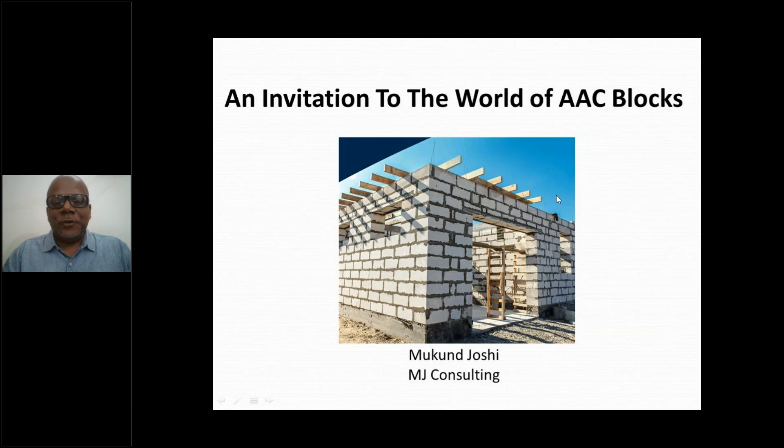Friends, you all were shocked yesterday when we heard about Russia entering Ukraine and the war began. A similar thing happened in Europe at the time of the First World War, and unfortunately there was a lot of destruction. After the war ended, Europe wanted a building material that would help them build houses which would keep the cold outside.

They were looking for a building material, and a Swedish architect cum scientist, Mr. Ericsson, invented aerated concrete in the year 1920. Their purpose was to keep the cold out of the house. Our purpose is to keep the heat away from our home. So the purpose is the same, thermal insulation, and this product was invented to give a very high level of thermal insulation. We will go ahead and see how it happens.

This product gained popularity in Europe because of its lightweight nature and thermal insulating properties, and by 1935 there were already so many plants all over Europe producing AAC blocks, selling them, and people using them. So this is not a new product, although in our country we feel it has come only in the last 10 years, but in the world it has been there for more than 100 years. We are here in 2022, and this product was invented in 1920.

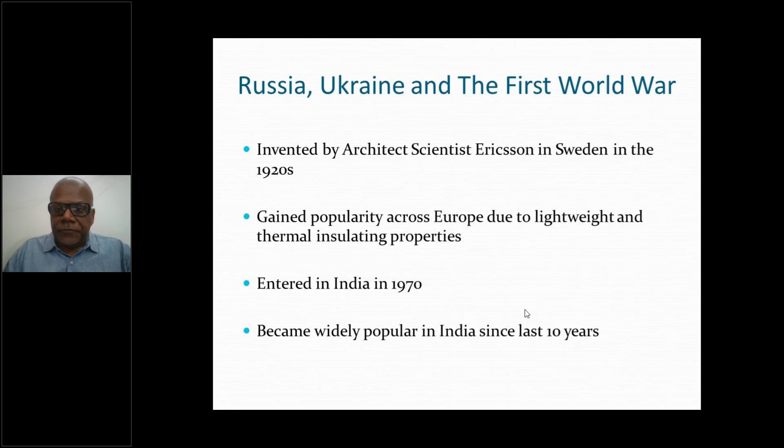We all civil engineers know that the strength of concrete is a function of time and temperature. During winter season like this, we know that de-shuttering gets delayed; we can't do speedy construction as we do in summer. There's a small delay because the temperatures are low and the strength development also becomes slow. So the strength development of cement is a multiplication of temperature and time. If you increase the temperature to 200 degrees like in this autoclave, you can extract the 28-day strength of your cement within a 12-hour period.

Many of my QC fellows know that we do accelerated curing in our batching plant just to predict the strength we are going to get. What is accelerated curing? You give heated water to your concrete cubes and get the strength—that's what we do.

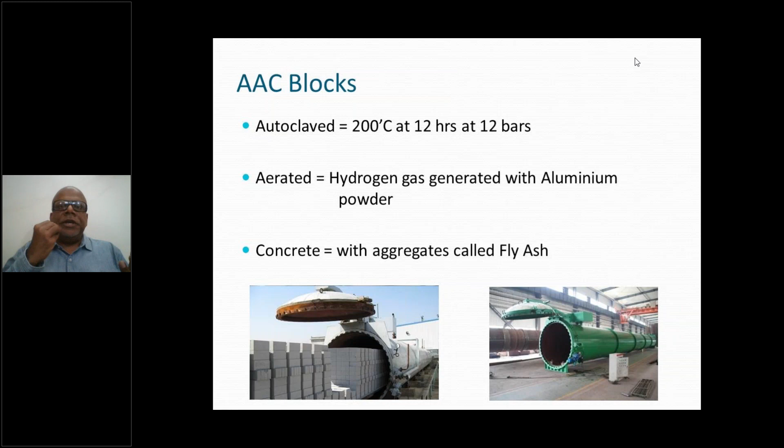So let's go to the next slide and see that mankind has been using red clay brick since 5,000 years now. Mohenjo-daro excavation, if you see, we still get the same brick which is there today, same dimensions, same properties. The whole world changed - we came to using mobiles and internet and everything - but the red clay brick did not change. It remained. Why? Because it was a good product. It had certain properties, you can make it at a very cheap cost without spending much money. The red clay brick can keep the heat away.

So in strength, when you ask for AAC block, you get a very consistent product, which is 4 Newton strength. The second most important reason, coming from our aeration, is density. Density means weight, let's not get confused by big words like density. Just the weight of brick is 2.5 times more than the weight of an AAC block of the same size.

So what happens because of that? Your whole construction becomes lightweight. Lightweight doesn't mean low strength. So it is high strength construction but low in weight.

Now this is a partition wall, right? What is behind me? Why would you want to increase the weight of this partition wall? This is not a load bearing member. We are all staying in RCC homes, right? So they are just for partition purpose.

So when you reduce the dead load of a building by using AAC block instead of brick, the dead load is suddenly reduced. This means you need less reinforcement steel, less concrete section, and the construction becomes cheaper. Also, because of this lightweight construction, the construction becomes earthquake resistant.

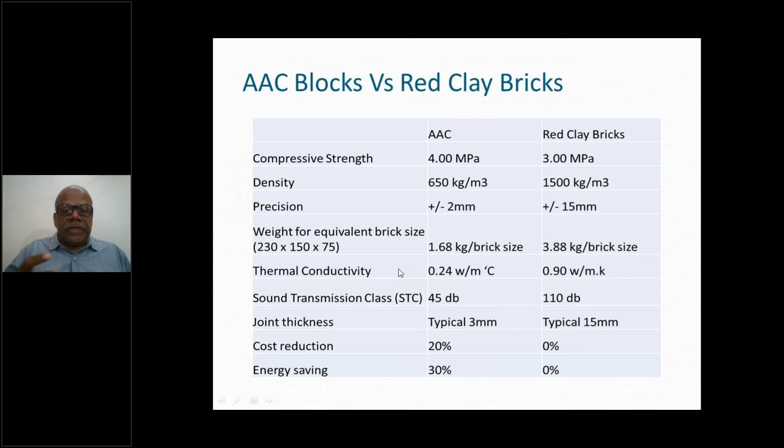Okay, now we will go to the next slide. In the meantime, also we have to look at the joint thickness. Because it is a factory made product, it is perfect in size and shape, so you need a very thin joint, not like our clay bricks where the shape is completely irregular.

You put a plumb bob on the inside of the wall and you get a very nice finish, but if you go outside, the whole wall is out of plumb. So you have to do a very thick plaster, more than 1 inch sometimes. With AAC you can do a very thin joint, very beautiful construction.

So by now we understand that if anything is heavier in weight, more heat will come inside, right? It will become uncomfortable to stay in a house. It will become more earthquake prone, that house. The cost of construction will go up, and that is how the density, the weight of the product, is so important. We'll go to the next slide now.

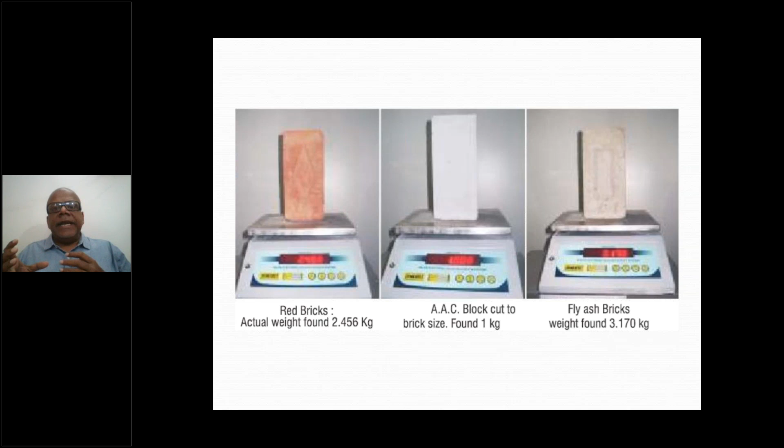And therefore you see that fly ash bricks came to India very strongly around year 2000, but they are not there now, because customers realized that if you stay in a fly ash brick house, it would be very warm compared to a red clay brick house. And even today customers get confused between AAC blocks and fly ash bricks.

Both of them contain fly ash, right? But are AAC blocks fly ash bricks? No, no, no, no, no. The main difference is aeration, the density.

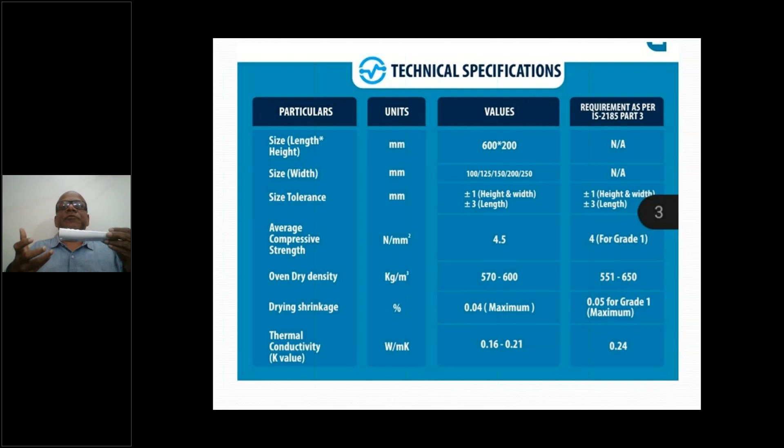So we are talking about aerated blocks density, how much? 650 kg per meter cube, even much lighter than water. If you take an AAC block and put it in water, it will float. So that low density we have got, and that is the magic, that is the secret of success for AAC blocks all over the world.

Here I have, if you look at the last column, it is about the IS code, and a very straightforward IS code we have got. A very nice IS code which tells us 5 properties. If you are going to order AAC blocks, what are the 5 properties you should check? So first is dimensional tolerance.

So lengthwise, maximum 3 mm is allowed, but height and width, which are so critical to us, should not be more than 1 millimeter. Then about the strength, you need to order a grade 1 block which will have a minimum strength of 4 Newton per mm square.

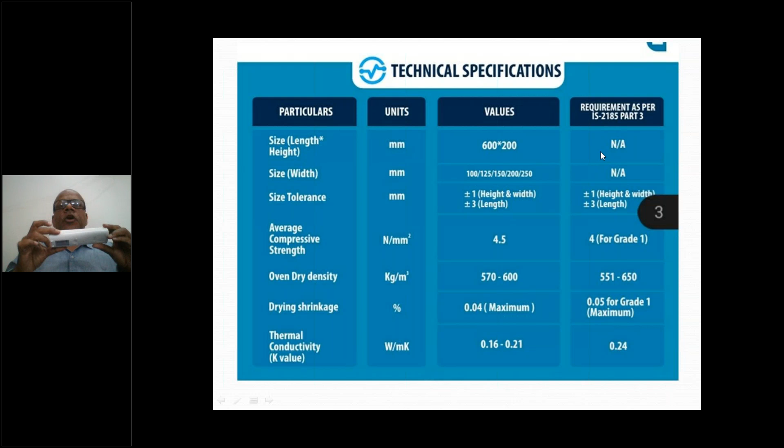The third point is density. As I said, the density should be less than 650 kg per meter cube, and this is dry density. So once you get a block on your side, take this block, put it in an oven for 42 hours to remove all the moisture. Friends, AAC blocks are made in an autoclave.

In the autoclave, a lot of steaming is done, so because of this cellular structure, a lot of moisture gets trapped inside. When AAC blocks come out of the autoclave, they have 25% moisture content. When you leave them for 48 hours, they come to equilibrium with the environment, reaching equilibrium humidity, and there is no more loss of moisture after that.

So we always advise clients not to use AAC blocks if they arrive hot on your side. If the block is hot, it means the plant dispatched it quickly, which happens when the customer is shouting and the labor force is sitting idle. But if you don't want any cracking issue in your wall, leave the blocks for 48 hours, let the humidity reach equilibrium with your atmosphere, and only then put them inside your wall.

So that is about our dry density. Then we come to the most important value, drying shrinkage. Now friends, everybody pays attention to the compressive strength of the block and the density of the block, and everybody misses this point.

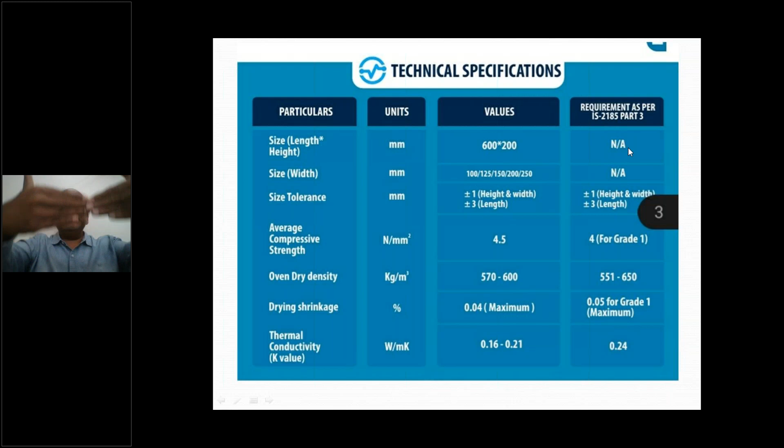And as a result, we face problems in our external plaster on the south and west sides, and it cracks. Why? Because of the shrinkage. All that heat coming on the plaster causes moisture loss, the plaster shrinks and cracks. So how do we protect it? You do solid curing for 15 days, covering the outside walls with Hessian cloth for 15 days. And if you want to ensure a crack-free plaster, as a contractor or builder, you don't want the customer coming and shouting at you afterward—make sure it is covered properly.

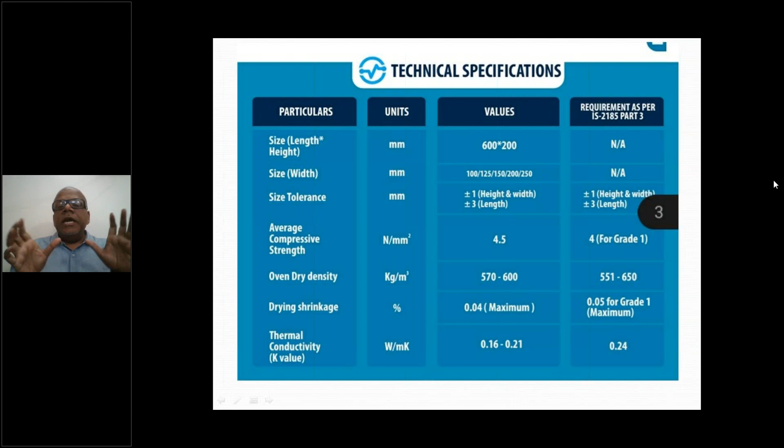Now a block of 4 MPa strength can just manage that. But if you increase the length of your free wall more than 5 meters, or 15 feet, then we need a vertical mullion - a vertical stiffener which will break the continuity of the wall. So in roads, we cut grooves; in bridges, we provide an expansion joint. In AAC walls, it will very rarely be more than 5 meters in residential construction, but sometimes there's a big hall where the continuous wall could exceed 5 meters. So please ensure there is a vertical mullion. What is a mullion? It's just a precast concrete small beam, about 6 by 6 inches in size.

Place it so that the continuity of the wall is broken and the shrinkage remains within control. In India, all the hot climate cities - Nagpur, Ahmedabad, Indore, and Delhi - these 4 names I know very well because I was involved in many projects where there was cracking issue due to substandard quality of AAC blocks being supplied. This is where the correlation between shrinkage value and strength comes in. So please, anytime you use AAC blocks, ensure the strength is not less than 4. Higher the strength, lower will be your drying shrinkage value, right? So if you want to ensure drying shrinkage is less than 0.05, order blocks of minimum 4 Newton per mm square strength.

The last property is thermal conductivity. You don't have to test it as a customer or client. If the dry density is below 650, your thermal conductivity will be less than 0.2, not even 0.24. So you are very safe about that. Just take care of your strength, density, and drying shrinkage value.

Now we will go to the next slide. Looking at the compressive strength of the block is also not very easy to calculate. Let's see how we go ahead and have a look at that. So Anjali ji, can we go to the next slide?

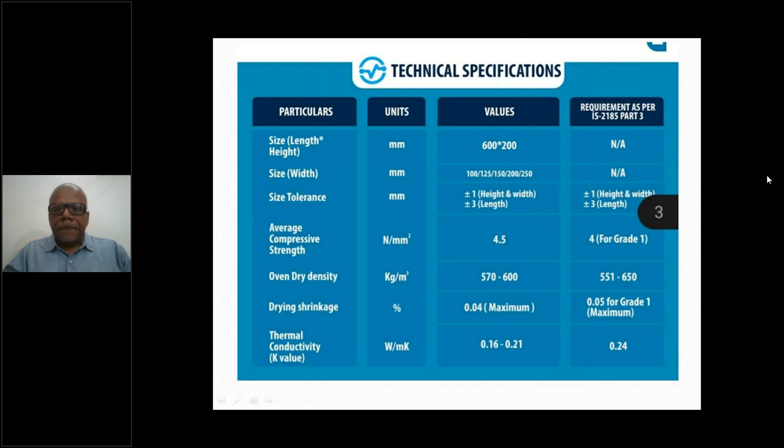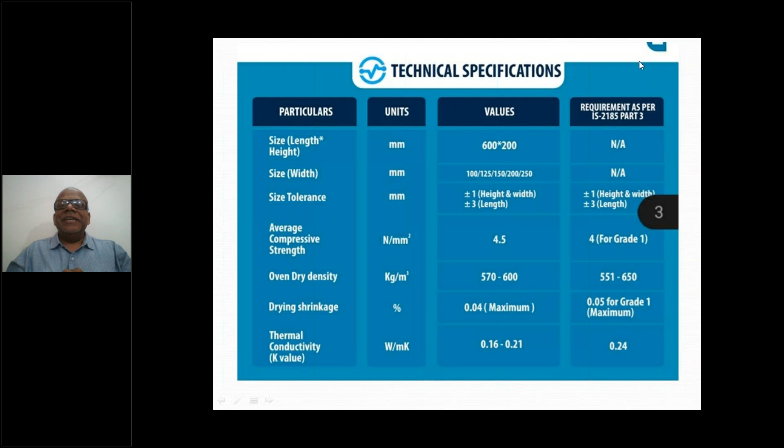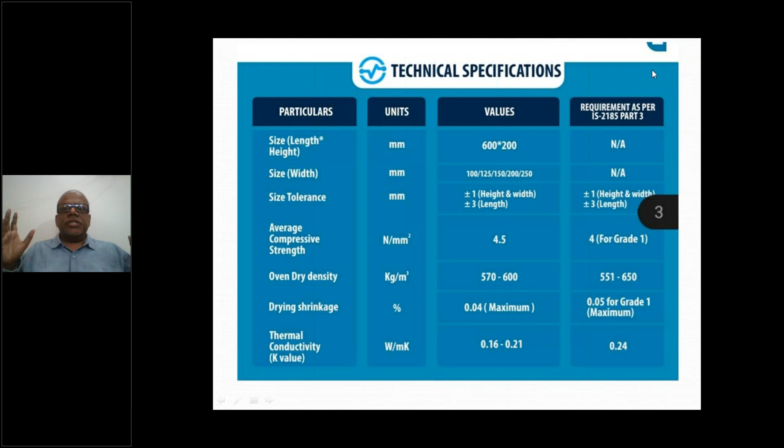Because remember, AAC blocks - I'm saying a lot of good things, but there are certain challenges while using it. Whenever it is a low self-weight product and you are doing a load bearing construction - what is load bearing construction? No beams, no columns, directly walls and roof on that. So all that roof load comes on our walls. So walls need to have some stability, right? With red clay bricks there was no question because of high self weight - so the disadvantage becomes an advantage in this case. So for any load bearing construction, ensure you have minimum 200mm outside wall and 150mm inside wall. This is what our IS code says while using AAC blocks. And for non-load bearing structures like RCC, your internal walls can be 100mm and outside walls can be 150mm. Okay, let's go ahead.

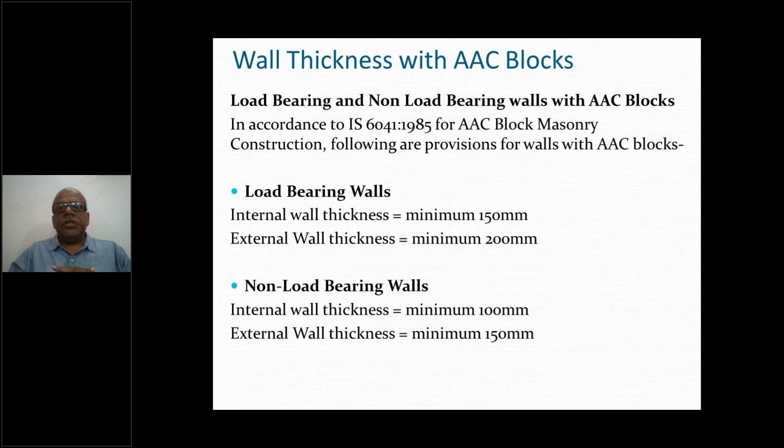And as I was saying, in Western India, almost all construction today is with AAC, and in very few pockets you will find red clay bricks being used. Why? Because of all these key benefits. The first one we saw - lightweight, meaning lower concrete and steel, economical construction. Aeration gives great fire resistance. Suddenly in the last 2 years AAC blocks have become very popular in the Gulf. Why?

Because fire resistance is a very important property for them in the Gulf, and no other product gives you fire resistance like AAC blocks give you.

Then you have superior thermal efficiency. Let me give you an example. Suppose you want to construct your own bungalow in a very hot city, like Nagpur, where the atmospheric temperature goes beyond 48 degrees sometimes. So you decide to have your outside wall thickness 9-inch with AAC blocks because you want to keep the heat away. Now the same house, if you do with red clay bricks, you will need 14-inch wall thickness to give you the same comfort, the same thermal insulation in the hot climate. So 9-inch against 14-inch, this is easier to understand, instead of comparing 0.9 thermal conductivity against 0.24.

And I have a book on AAC blocks, published by Amazon, where I have given a detailed calculation on how to arrive at wall thickness for your comfort compared to red clay bricks, and how to use that thermal conductivity value in the calculation.

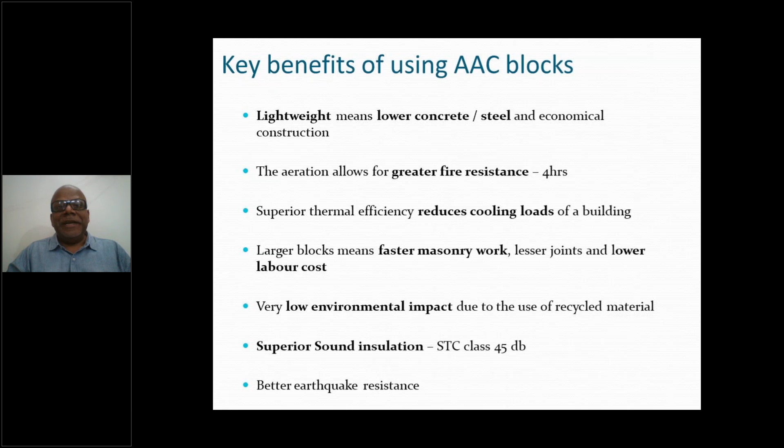And of course I have spoken about better earthquake resistance. Let's go to next slide. We have to cover still a lot of material, and we are running behind time, sorry for that.

So, understanding fly ash. Now 65% material in our AAC is fly ash. Friends, we know that when we did our cement manufacturing over the last 50 years, earlier it was 33 grade of OPC, then we changed from 33 to 43, from 43 to 53 grade of OPC.

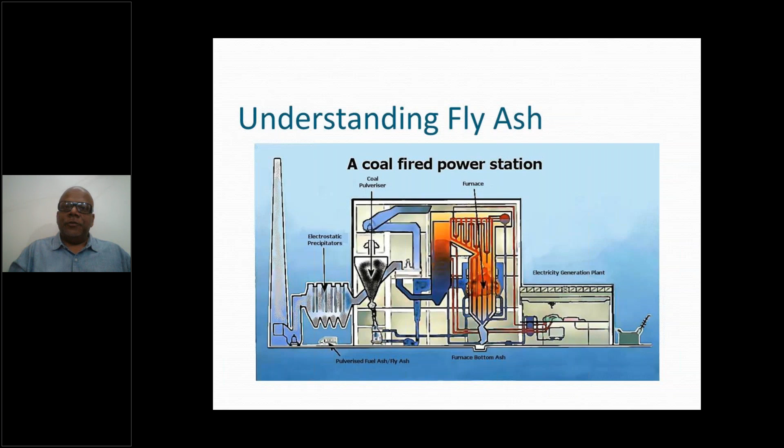Now as we went on increasing the strength of our cement, nature gave us a side effect. We all know that if you try for speed, there is always some side effect. If you use chemical fertilizers, the soil will lose its value. If you use strong allopathic medicines, there would be some side effect.

So the same side effects started coming in our concrete in the form of calcium hydroxide, free hydroxide. If you look with your eyes at your freshly done plaster, you will find white patches on that. If you go to your retaining wall, you will find the white line coming down after every 3 meters. All this white material is the gift from OPC to us. 25% calcium hydroxide getting formed in

the hydrated CSH gel. And so fly ash came in, and what it did was convert this calcium hydroxide again into secondary CSH gel. So therefore all the construction today, most of the concrete that you will be using on your sites will contain GGBFS or fly ash.

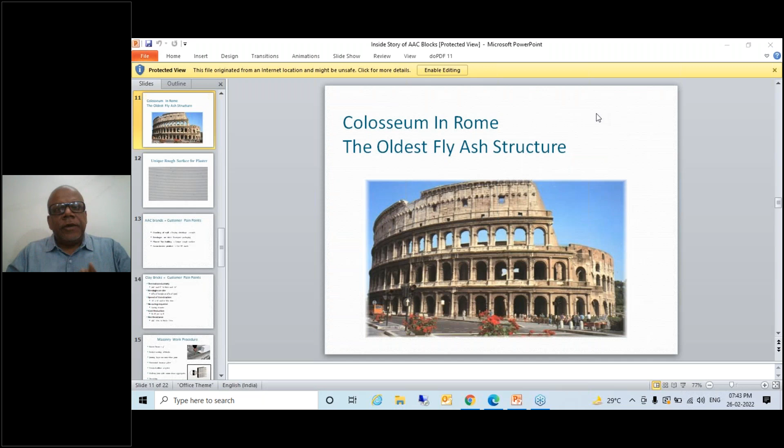Today Burj Khalifa from Dubai used 25% fly ash in their concrete. They imported it from India. I was part of the mix design team in Burj Khalifa as an advisor, and for them the cost of fly ash is 50% more than the cost of their local cement. So for them it is an invaluable material.

They are importing it into their country. But we look at fly ash as a waste product. It is not a waste product. It is reactive silica and alumina, which is going to give a lot of strength and durability to your concrete.

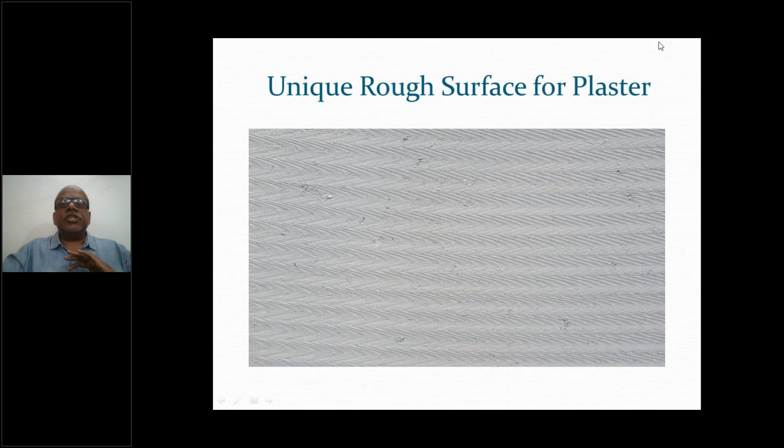Okay, so this is our typical surface of an AAC block. It should have this textured surface so that plaster will hold it properly. Let's go ahead to the next slide.

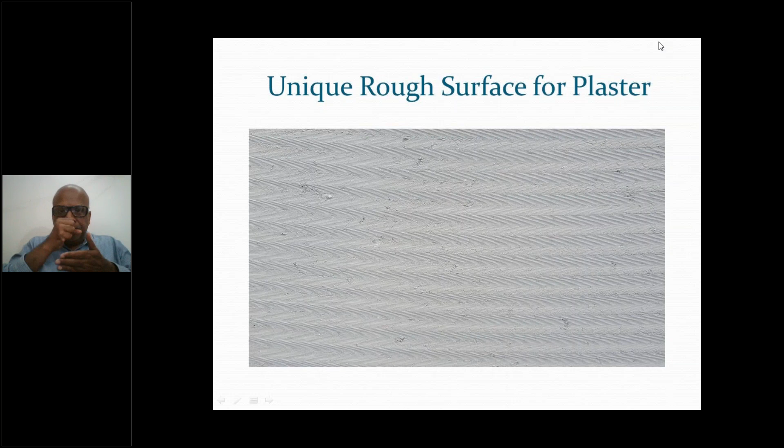And this plaster holding is important because AAC block is a factory finished product, and therefore there is a possibility that if the surface is too smooth, the plaster may fall down. And these are some of the customer pain points with various AAC brands which are there today. First one, cracking of wall - the drying shrinkage value should be less than 0.05%.

Second is breakages on site. When the truck reaches your site, if the packaging is not done properly, there can be breakages. So check the packaging if you are getting a lot of broken blocks.

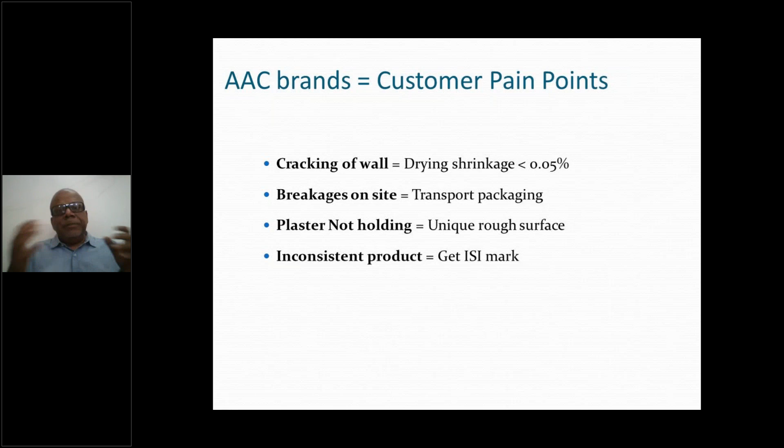If plaster is not holding, order blocks which have got a textured surface so that the plaster will hold to them. And of course, there's inconsistency in the quality of AAC blocks. So many plants have got ISI mark today, so make it mandatory to your supplier that each block should have ISI mark.

I don't want to go deep into clay bricks' pain points again, we have covered most of them. First, thermal conductivity, we have covered. Breakages - when red clay bricks are unloaded on site, we get a big heap of broken bricks. That's normal, but we accept it, we say, bricks hain, aise to hoga hi.

Speed of construction with AAC - you can do a 10 by 10 wall in 50% of the time compared to clay bricks. Saving in water, no curing required. The chemical mortar you get for fixing AAC blocks is cheaper than using sand and cement, and curing is not required because it has got polymers in it.

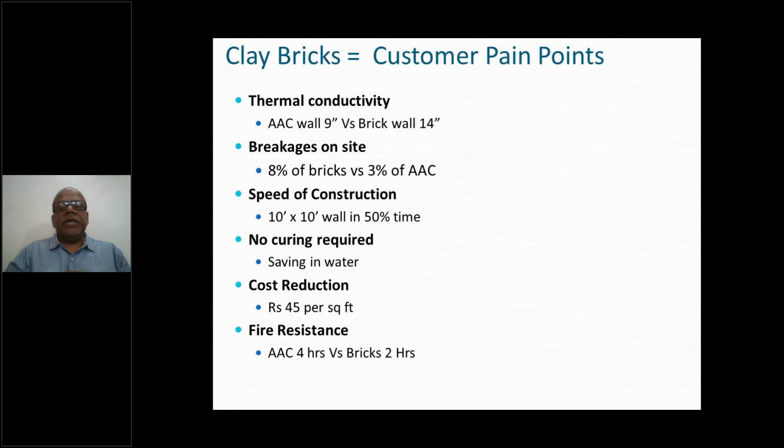So totally, we get about 45-50 rupees reduction per square foot in construction cost. And of course fire resistance - as I mentioned, AAC blocks have got 4 hours and bricks have got 2 hours.

This is an important slide for anyone who wants to learn how to do the masonry. You need to have a starter beam, and you need to do the surface wetting of blocks.

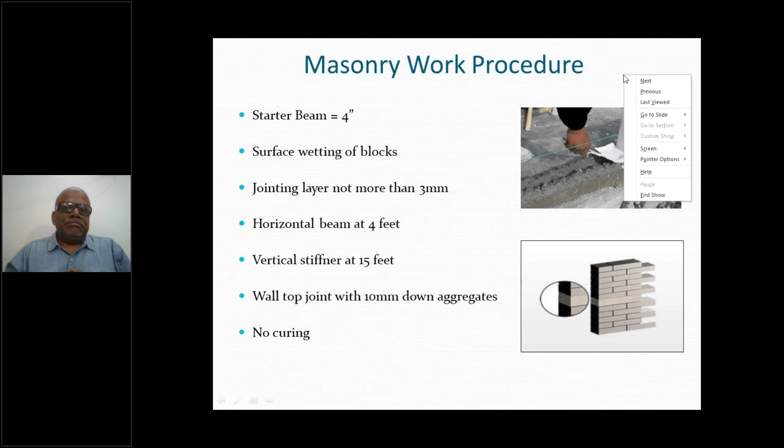As you go ahead doing layer by layer of AAC and reach the beam bottom, unfortunately our beam on top always has some deflection at the center, right? And that deflection causes shock waves in our wall. So we pack it with aggregate stones and then we fill the mortar.

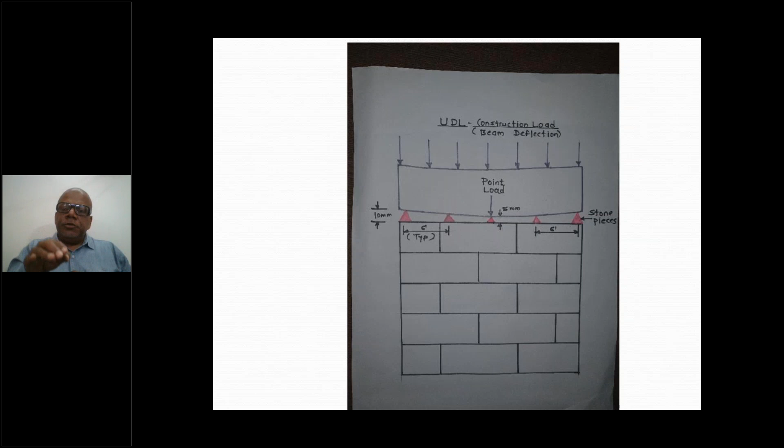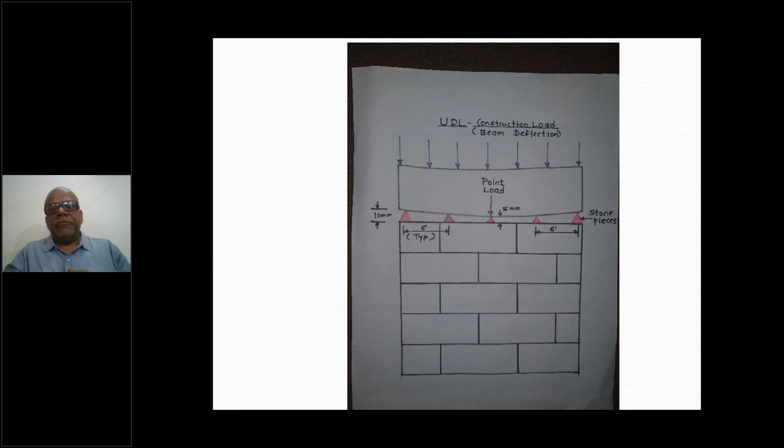Second problem is workmanship on site. Do go to my video, it's a complete 10-15 minute video on how it has to be done step by step. I'm sure if you have any practical issues, you will be able to solve them after watching that video. Okay, we can go to the next slide now.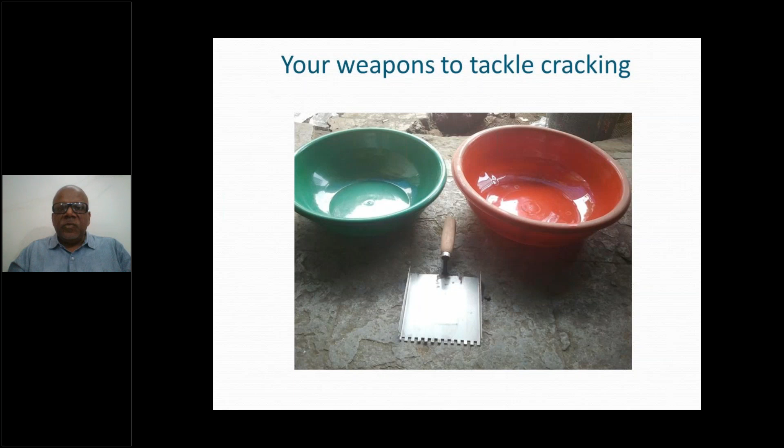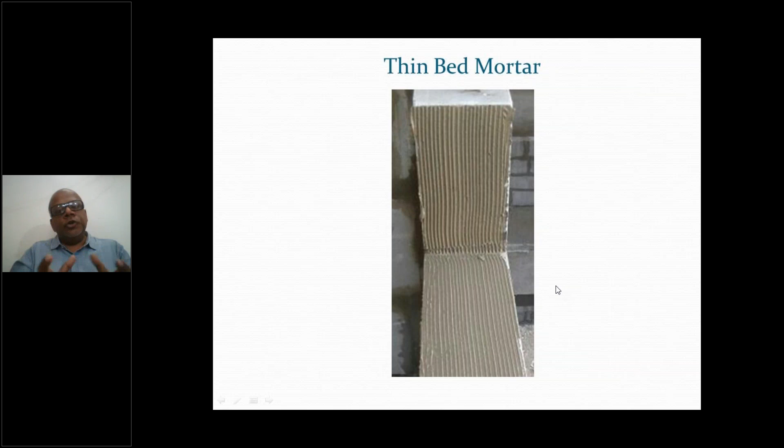So friends, then we look at the mortar, how we apply it. You see how beautiful the work is done, just a 3 millimeter joint. It saves you cost and also gives durability to your wall. We can go ahead to the next slide.

So there are a lot of mortars available. Even big companies like Ultratech, QCrete, they all have mortars in their own brand. You can take any mortar from that. Even Weber, Saint Gobain has got their own mortar in the market. The strength should be minimum 12 Newton per mm square.

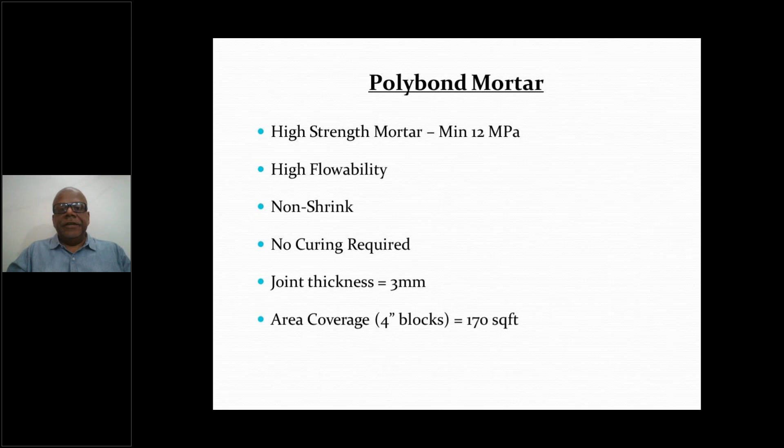It should be a flowable mortar. The mason should feel that it's like makhan when he's applying it. It should be non-shrink, and of course curing is not required, because there are polymers inside the mortar. The typical area coverage per 40 kg bag is 170 square feet. Let's go ahead to the next slide.

So friends, when you use AAC blocks, the central government came up with a notification which helped the spread of alternative technologies. In the year 2000, the central government issued a notification that the use of clay bricks is banned within a 300-kilometer radius of any thermal power station, which means basically all over India, because we have more than 150 thermal power stations in our country.

You cannot manufacture red clay bricks, you cannot sell them, you cannot use them. Why? Because we use topsoil for making red clay brick. Nature takes 500 years for 1 inch of rock to convert into topsoil, and we remove it in 30 minutes, which results in deforestation, surface water runoff, and other environmental problems.

So friends, those days are gone when you could take fresh material for construction from nature. No, we have to look for recycled technologies like fly ash, GGBFS, and plastic waste. I am telling you, after 10 years, you are not even going to get aggregates to produce your concrete. Companies like QCrete, who are always at the forefront, are continuously doing a lot of R&D about what's next, what will happen after 10 years, and how we can give the best service to our customers.

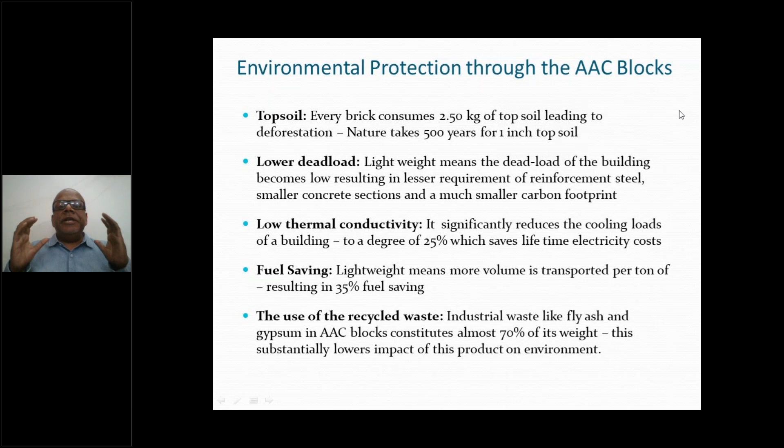So friends, environmental protection becomes very important, and all of us have to move towards a green earth by using green technology in all aspects. Thank you so much, and I'm sure you have many questions, let's take them. I request Anjali ma'am to ask, to say it aloud if there are any questions.

Hello. Yes sir, some questions I will start asking. Anjali, you can talk now, you can take the questions.

Hello, yes sir. So the first question is, in my construction, I've seen every 4 to 5 feet they make a 4-inch wide and 6-inch wide beam on AAC block. This question was asked by Khaja Constructions. Is it the correct way of doing it?